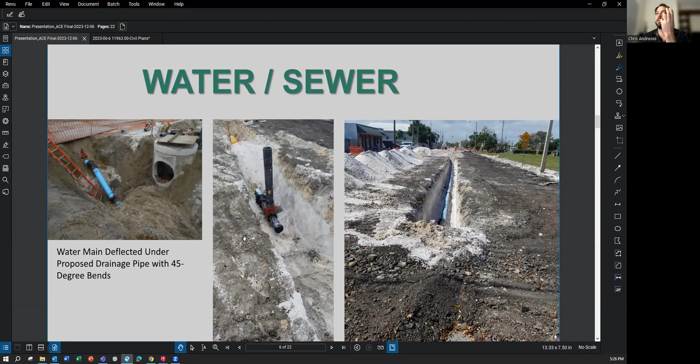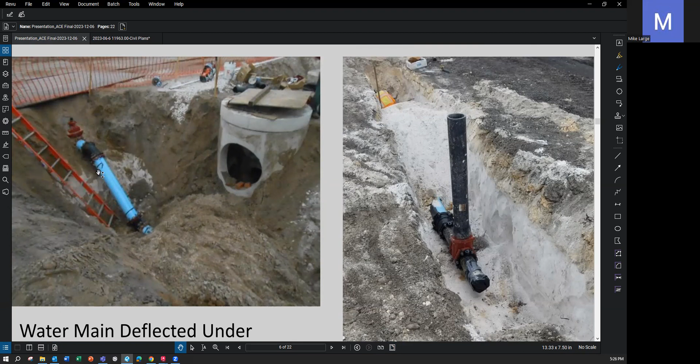Let's start with water. All right, some of the pictures on your screen are what things look like in construction. For instance, it looks like a 6-inch water main pipe going to a fire hydrant. Obviously, they're going to take care of the earthwork around it, but it's coming off a water main. And this is how water main construction looks. It's really just a bunch of pipes. It's exactly what you think.

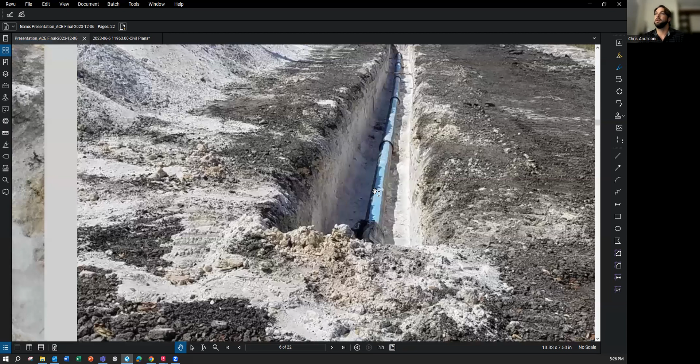Real quick, the big difference between all three, and try to remember this as I continue: water is pressurized pipe, right? The water flows in the pipe via pressure. The city has pumps and water treatment plants. That's kind of home base where all that pressure happens. So it's under pressure. Sewer runs by gravity. It just kind of falls through the pipe. You need gravity for sewer to travel through pipe.

And if you don't know what sewer is, sanitary sewer is basically everything that goes down the drain in your shower or your toilet. And then drainage, that has to do with water tables. That just goes up and down. It's not gravity, it's not pressure. It has to do with the water table in the area. Again, we'll touch on all three of those things, but those are the three major differences between the three types of utilities.

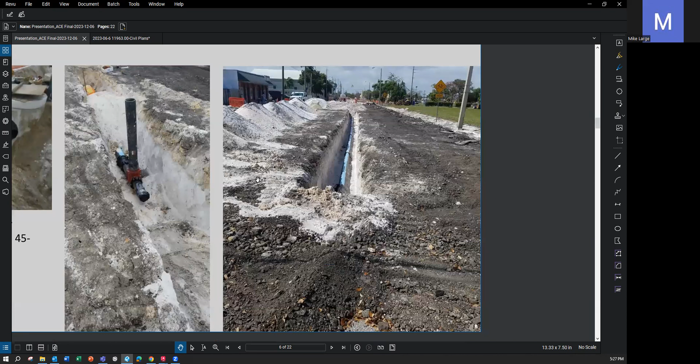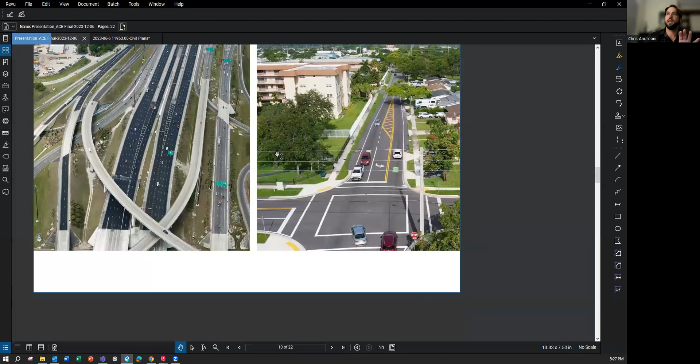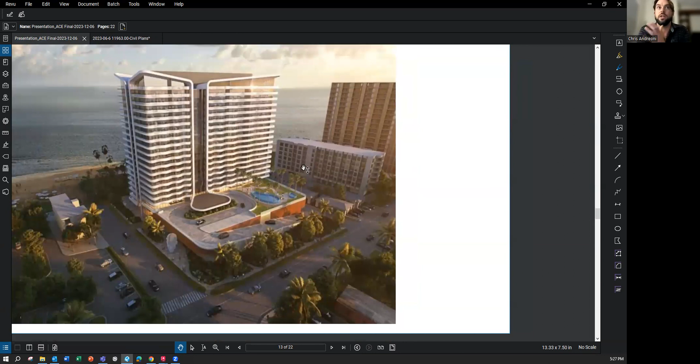So what I want to do real quick is jump around here a little bit. I think the best way to explain these things to you guys is to go through one set of plans. Okay. So the project I'm working on right now, we have a picture of it. It looks like this. This is called Casamar. It's a condominium I'm working on on the beach here in Pompano Beach. They actually just started construction maybe a month or two ago. But what you're seeing here isn't real. It's a rendering, something the architect would have done.

The architect is the creative genius of it all. What does it look like? The engineer is the one that makes it a reality. But this is where it starts. I get this picture. Oh, cool. We're going to be working on this, and then two years down the road, we're finally building it. But this is the project. I'm going to go through a set of plans. Just wanted you guys to see the final product, because sometimes it's hard to see plans for the first time. So here it is.

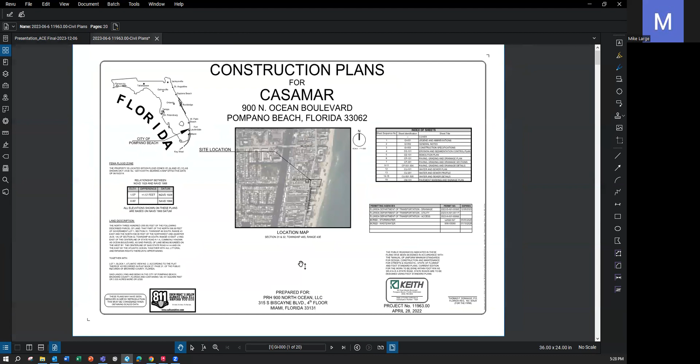It's a 20-page set of plans. This is what a civil engineer would be responsible for preparing. Cover sheet, project location, table of contents. Nothing much to explain here. The next few sheets are the legend in our plans, the general details, kind of a lot of city code in here and all that. No need to go over those.

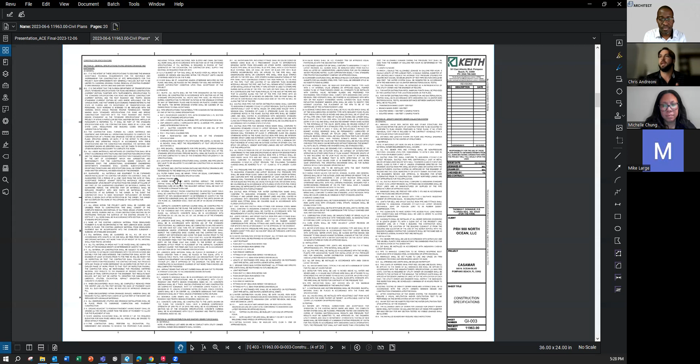And same with the specifications, material parts. All that stuff is standard language. I don't type that every time per project. Those are kind of the standard first 4 sheets. But here we go. We're going into our first actual sheet here. This one's called the erosion control and sedimentation plan.

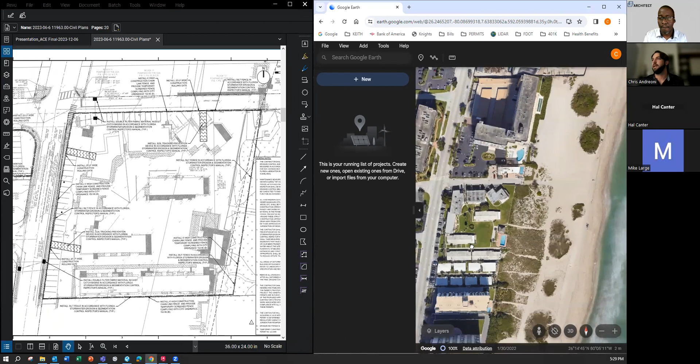All right. And what you're seeing here is the existing conditions of the site. And again, I know it's hard to read plans, so I thought ahead and I pulled up the aerial. I'll see if I can put them side by side. What you're going to see in this box over here is this site right here. See it? So that picture I just showed you with the condominium, we're going to demolish all of this stuff and build a condo on top. But building, that's all this stuff is.

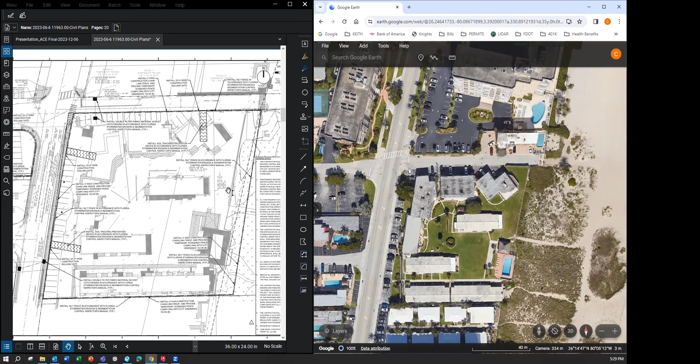This particular plan here, erosion control, it's basically you cannot pollute any of the existing drainage, stormwater system. I don't want to spend too much time on this plan, but it's basically a pollution prevention plan. This is where the contractor will access the site. He's got a rock bed that he's got to wash his trucks down. Same over here. And then over here, you can kind of see the line work.

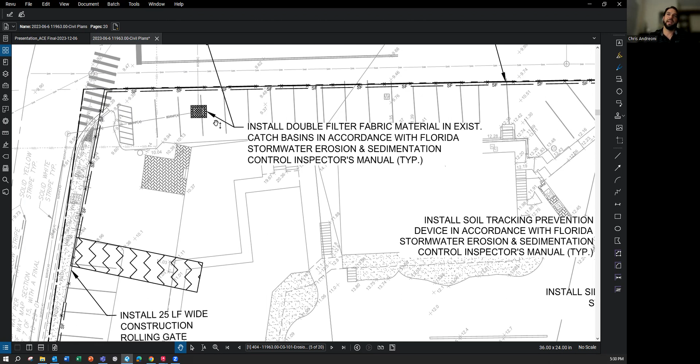That's a catch basin, a drainage inlet where the rainwater would flow to. You got to protect those. You got to put fabric over it. You don't want construction debris getting into the drainage system, because then it goes to the ocean, and we're trying not to pollute the ocean. So this whole plan is a way to prevent pollution. I don't want to focus on this because I know you guys need water sewer drainage, but might as well go through a whole set of plans.

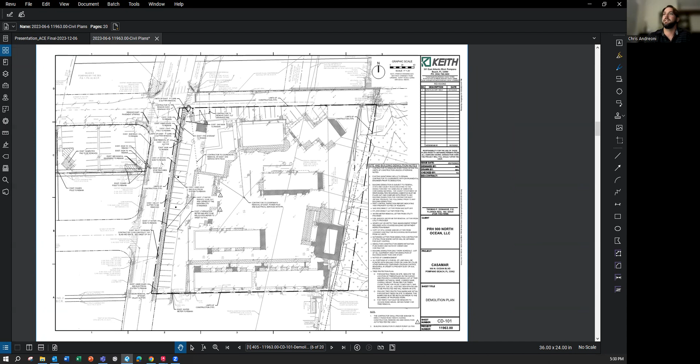Here's the demolition plan. Again, a picture of the existing conditions of the site. Essentially what this plan says, demolish everything within this big black line, and calls out some of the specifics. The existing electrical hand hole, keep that, don't demolish that. We're doing some work across the street too. The bus stop, let's make sure that stays.

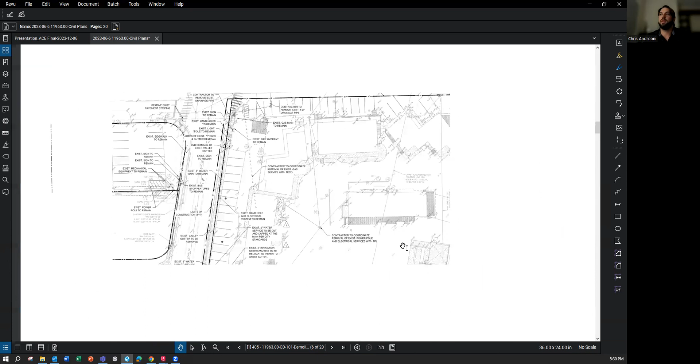So these call outs are basically things that should remain that are within this demolition box. But that's what a demolition plan basically looks like. What are you going to tear down? Everything in this box, unless I say otherwise.

Sorry. If everyone else could mute your microphone, that would help. Thanks.

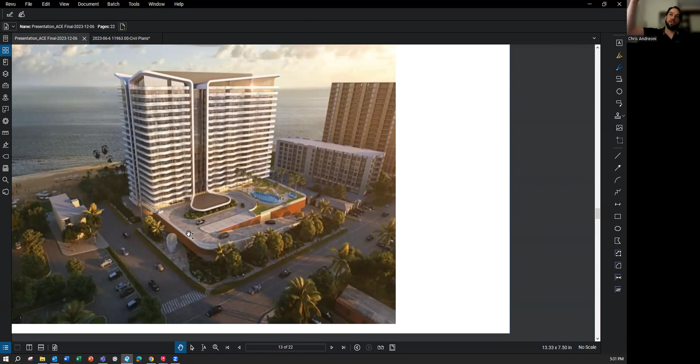All right, so just because of the order, let's talk drainage, water sewer drainage. We're going to talk drainage now. And here you're finally seeing the proposed site. And again, I know it might not look quite like this, but you got to think you're looking top down. All right. So you got the ocean over here, you got the street over here. Over here on this plan, ocean's in the back. Here's the street. And you can pretend you can kind of see through the building, right?

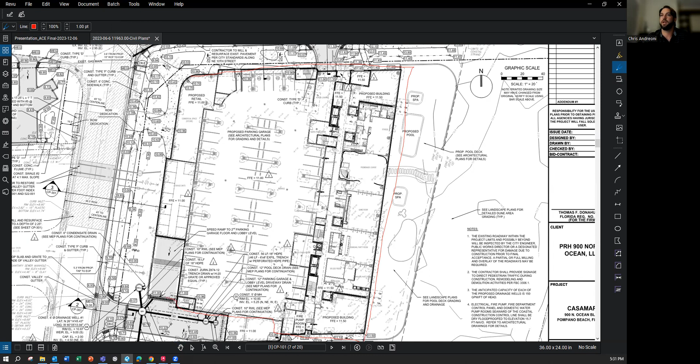That's going to be a parking garage on the first floor. What you're seeing is kind of the first floor plan. Okay. And that's provided by the architect, what I'm somewhat tracing in red right here. The civil engineer doesn't design the building. We design the site, which is everything around it. What I kind of trace in red real quick, that's the building provided to me by the architect. I take his CAD file and I slap it into the survey and start doing my part.

So in this particular job, the drainage design is shown here. If you see, it's kind of bold. And this is what it looks like below ground. You got your driveway entrance here. And if you remember from that picture, you have the ramp that goes up to that second level, right? Right here, there's that ramp. That's what you're seeing on the plan here.

And for this particular drainage design, it wasn't too complicated. What we did is we designed wells, right? So basically what happens is the water falls on the street.

That's a drainage flow area. It's going to travel to a catch basin, which is here. There's an inlet, and here's an inlet. All the water is going to travel into these two inlets some way, somehow. And then it's going to work its way through this pipe system to basically make its way to the

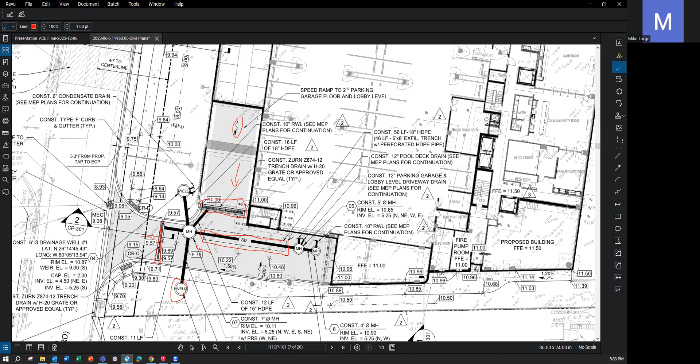well. So you have roof drains coming from inside the building, like a gutter, basically, going right into the system, traveling through what's called an exfiltration trench. That's basically a pipe in a rock bed. And that's how filtration occurs prior to discharging into the well, and the well pumps the water into the groundwater

table below the earth. So that well might go 50, 60, 70 feet deep, depending on what it is. And the water all makes its way to its well, and that's where the water goes. So when it rains, that's how it doesn't flood. It goes to this well, and part of the civil engineering design for it is a lot of math involved to figure out how fast is that well going to drink the water.

Is it going to drink the water fast enough where your site doesn't flood? Are you meeting pollution requirements, aka the exfiltration trench? Are you treating the water before you're discharging to the well? This particular site had 2 wells, probably because the first well didn't have enough capacity.

And the way you check its capacity, you go out there, you do exploratory drilling, and it's as simple as drilling maybe a 4-inch hole until you hit the water table, the aquifer. And the guy will go out there, fill that pipe that he just drilled with water, and kind of time how long it takes the water to go down. And that gives you flow, right? Volume of water over time, that's flow.

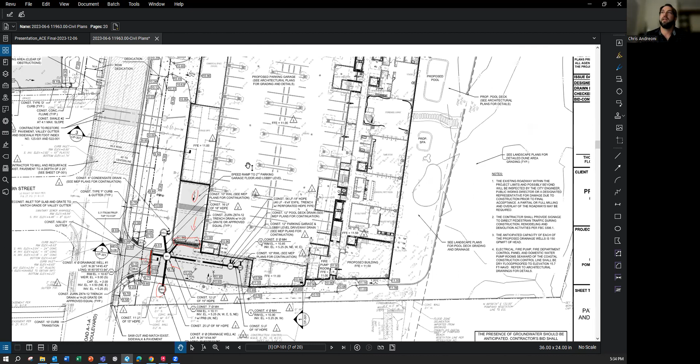So all that math and what you'll learn in school and college, basically: do these 2 wells drink enough water fast enough to make sure this entire site does not flood? And that's drainage. A quick question on the wells. What's the makeup of the wells? Like if you were to cut a section through a well, what does it look like?

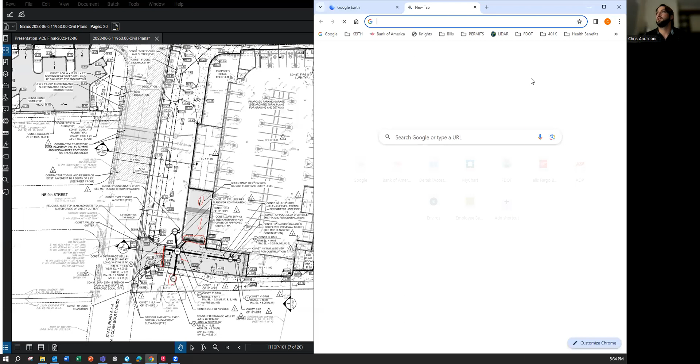Is it rocks or... Good thing about Google, we have image search. Okay. Probably easier to show you on an image than it is to explain it. There you go. Something like this. Right, so this is how the water gets from the site, then it gets into the well. This well is drilled. It's just a big hole in the ground, and it's got rocks around the perimeter.

They have a pipe coming up, and basically the water percolates through the rocks and into the ground or the earth. So how fast does the water percolate? This water needs to percolate into the earth faster than my site floods, essentially. So that's a very generic way of what a well looks like.

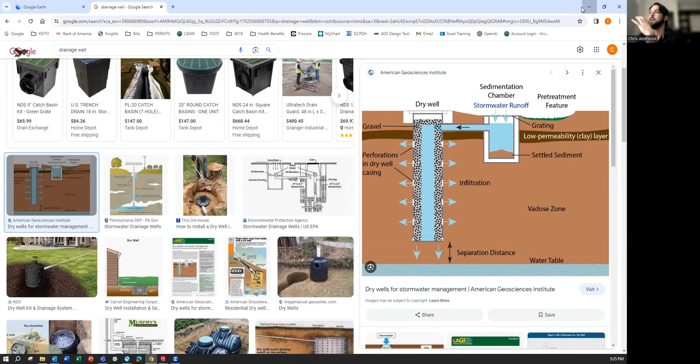And to get more technical, on a civil engineering plan, this brings me to my next sheet, we have details. So when you go from your paving, grading, and drainage, now you can go reference your details. So that's what these next few sheets are. Without talking about every nitty-gritty detail, I'll go over and show you what the well detail looks like and the

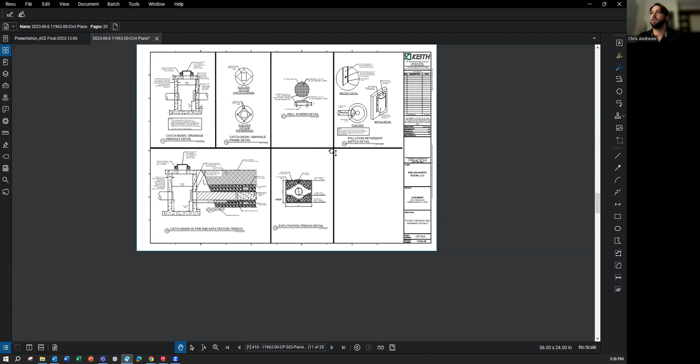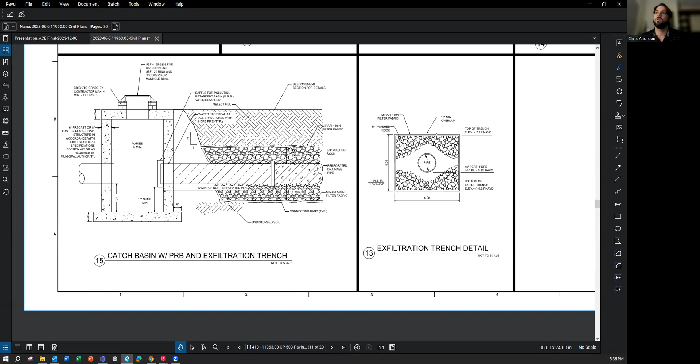exfiltration trench. So real quick, that exfiltration trench, this is what I was talking about. It's a perforated pipe. It's a pipe with holes. Kind of works like a well. It's working left to right instead of up to down. Water gets into the catch basin, travels through here, percolates through this rock bed. That's considered a way of treating the stormwater prior to it making its way to the well. So the well is downstream of here.

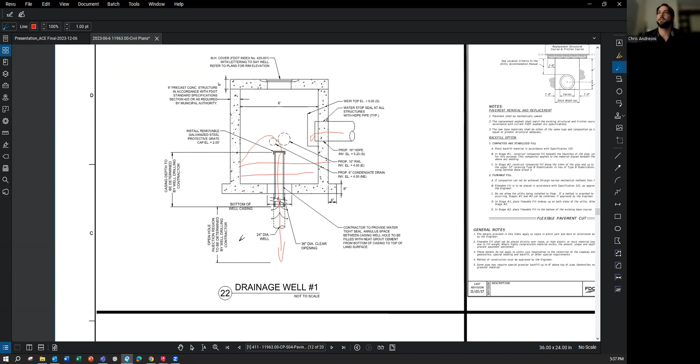But that's how a well works in a nutshell, without getting into a dissertation of it all. But last thing I'll mention on the paving, grading, and drainage sheet is, yeah, that's what the drainage infrastructure looks like: the catch basins, the manholes, and the pipes that interconnect them all. Another big thing on this page is you see the grading, right? That's what all these little numbers are. That's our way of designing which way the water goes.

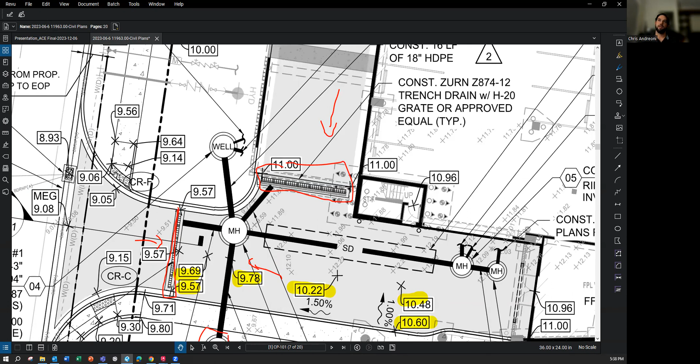Over here, you have a sidewalk. You got the handicap ramp. Comes up from elevation 914 to 964. This is in feet. So the difference between 64 and 14 is 50, or half a foot, 6 inches. So those handicap ramps always come up at a 6-inch elevation. So the sidewalk's high, slopes down to meet the grade of the street, cross the street, come back up and hit the sidewalk here. And then they slope up. But that's what all these little numbers are.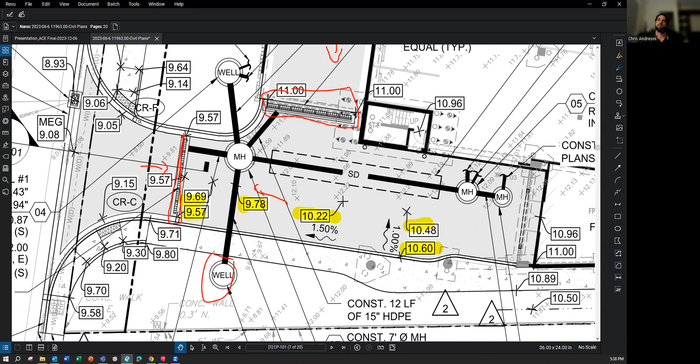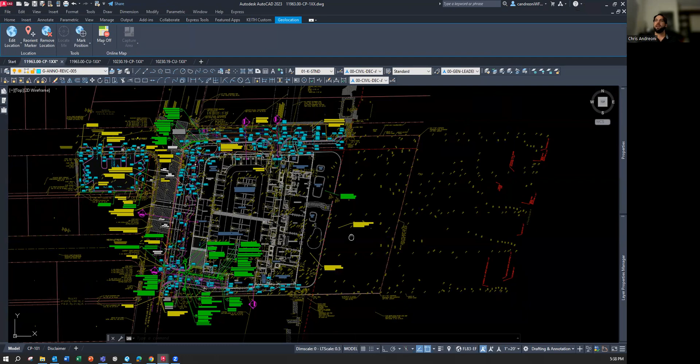So your grading design has a lot to do with your drainage as well. You got to get the water to travel to the inlets, right? So that's drainage in a nutshell. And just for fun, because we said we'd talk about CAD a little bit, this exact same sheet, this is what it looks like in AutoCAD. Okay. Over here, you got some colors, a little easier to differentiate between what's what. And you also have ways of isolating things. So I have all my labels calling it out, but what I can do is I can freeze some things. So maybe you can just see the site and what we care about, right?

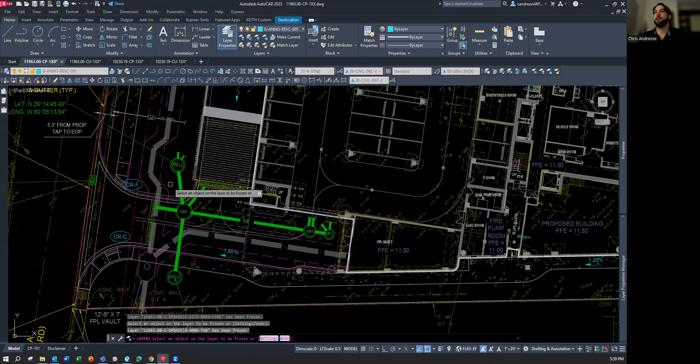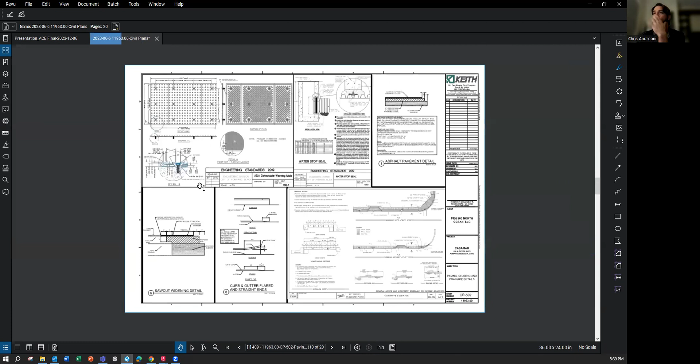So all this stuff is just physically drawn in AutoCAD, and it's just a bunch of lines and circles and a lot of geometry. But there's the drainage in green, and yeah, this is kind of what it looks like in AutoCAD. Draw the lines, label it. So that's drainage. Any questions on drainage before I move on? Okay. We'll go over to the next plan. So these next few sheets are the details specific to the paving, grading, and drainage sheet, right?

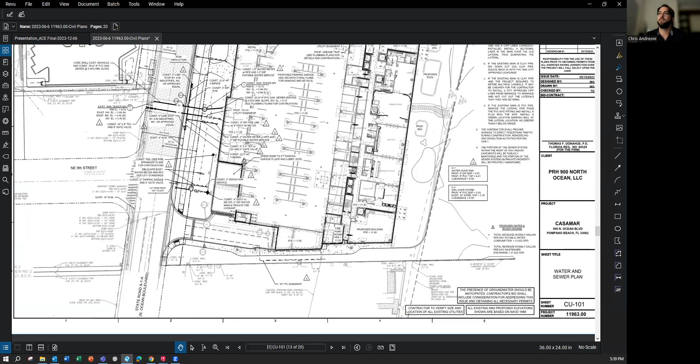The next plan is your water and sewer plan, right? So in this particular plan, you still got the building. Again, that's the parking garage. Remember, you're looking at the roof down. So don't pay too much attention to this. We're just worried about the site as civil engineers. So we talked about drainage. It's kind of faded in the background of this plan because this plan's not about the drainage. It's about the water and the sewer, right? So that's why these callouts are now bold. So we'll start with water.

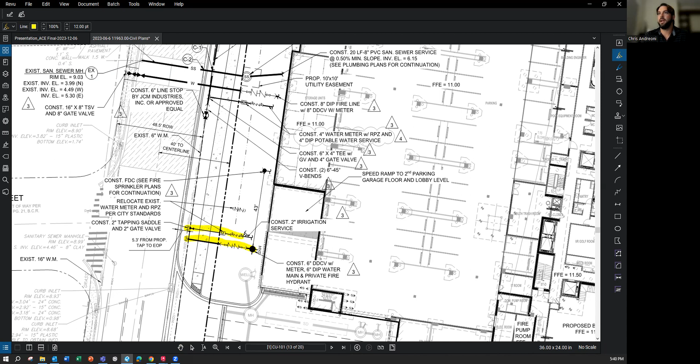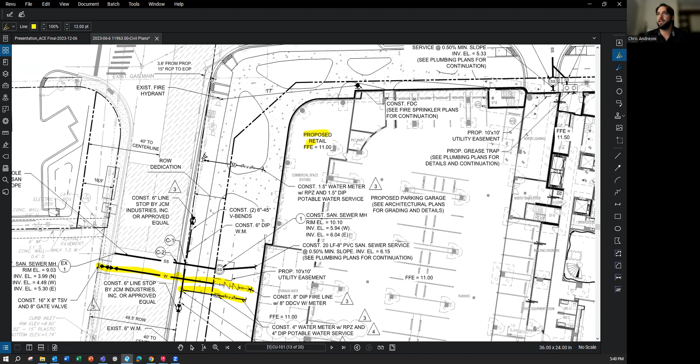So for the water, we have a fire hydrant. We have your irrigation line right here, your 2-inch irrigation service. You have your fire department connection over here. Over here, you have your potable water design, your fire sprinkler design. Okay, and we'll stay focused on water. That's the sanitary. We'll come back to that. And this particular building has a restaurant or a retail right here, kind of on the first floor. So it needed its own water service with meter and backflow.

And that's what this symbol is. M is for water meter. That's how you get your water bill. And the backflow preventer is what this symbol is. A backflow preventer, essentially, lets water go one way. It lets water go this way, but it won't let it go back that way. It stops right there. Because once the water crosses your meter, it's your water, you own it.

But what this is, W, that stands for existing water. This is the existing water main system that's in the city street. So what we're doing is we're tapping into the city water system here. So that's what this is. We excavate down, find the water main, we cut it, or we do a tapping sleeve and valve, we tie our pipe in, install our meter and backflow preventer.

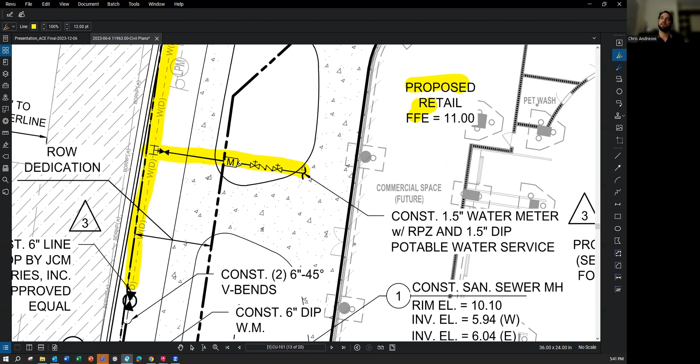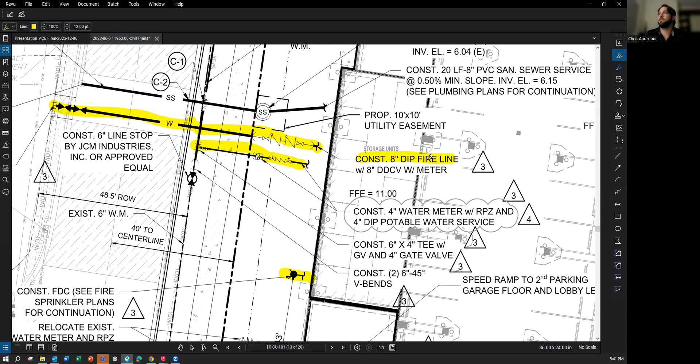So this one in particular is for this retail space. And then for this condo, this big condominium building, it needs fire sprinkler. Fire sprinkler water, it's an 8-inch water right here, 8-inch ductile iron pipe. That's the material. Fire line with 8-inch double detector check valve. Double detector check valve is just a specialty backflow preventer for fire sprinkler, but it's the same thing.

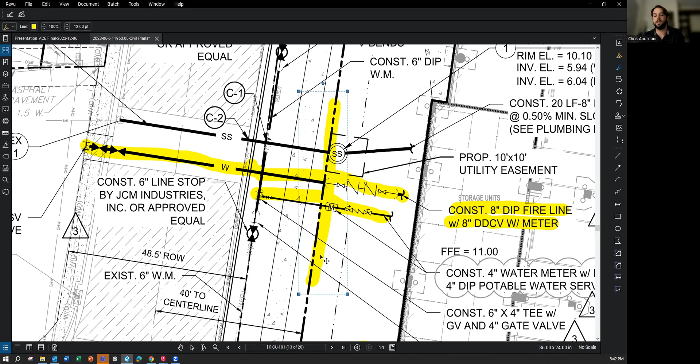You tie into the city system here, provide the 8-inch pipe with the proper backflow so you don't pollute the public system, because this is the property line. Once it crosses the property line, it's your water. So backflow preventers are required so the water doesn't get back into the system. And just so you know what those things look like, you see them all the time driving around, but you've never noticed them.

They look like this. You see them all the time in the streets, probably see them outside the front of your school, but that's all it is. It's above ground. The water comes in, this apparatus prevents the water from going back. It's 8-inch pipe. That's what supplies your fire sprinklers. Okay. And then for the other backflow preventers, it's a similar device. It's just smaller because the pipes are smaller.

But going back, so that's what these things are. Tap into your city water supply, provide your meter so you can get your water bill, and provide a backflow preventer so you don't pollute the public water supply. For this particular site, it's a very simple site. Notice, why wouldn't I just tap into the city main one time and then stub off and supply all my water off one thing? You'll learn this in college. That doesn't work for hydraulics.

Without getting into a hydraulics lesson, each one of these features needs its own tap off the city main. And that's required by building code, and again, it has a lot to do with the hydraulics, the amount of pressure of water flowing through those pipes. The more length you add to this line, the less pressure you're going to get downstream. So that's why you do individual taps for these things. So a fire hydrant is here, and then this is for your irrigation.

But what I do want to talk about real quick when it comes to water, let's talk fire. Right here, you have what's called a fire department connection and a fire hydrant. And if you've ever heard fire trucks called pump trucks or pump engines, this is why. In case of a fire, a truck would park here in the street. He'd take his fire hose, he'd hook it up to the fire hydrant. His truck is a pump, and he'd hook a hose up to this fire department connection.

So let's say the city water supply is losing pressure in the event of a fire. The fire sprinklers have been running, it's starting to lose water pressure. Now you can pull up a fire truck, hook up to a hydrant, and pump water right into the fire sprinkler system. So that's what a fire department connection is. It's a way to repressurize the fire sprinkler system in the event that you lose pressure. Initially, the fire sprinkler system will be supplied through here.

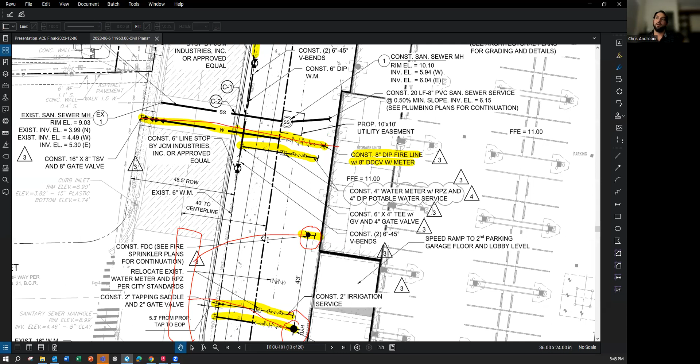And once you get into the building, now we're talking plumbing. Civil engineering and plumbing, two different scopes. So that's why the civil engineer's job ends pretty much 5 feet outside the building. But that's water in a nutshell. We talked fire water, hydrant, potable water or drinkable water. For the main condo, they need a 4-inch potable line, meter, backflow, and for some of these retails, just a small 1.5-inch line. And the plumber helps you size those requirements. So that's water in a nutshell.

But on this plan, we also have sewer. Real quick, any questions about water? Okay. This sewer is nice and easy, so we'll go through it real quick.

Sewer is what this is. So everything that gets flushed down the toilet eventually makes its way to this one pipe and into the city sewer system. And the city sewer system eventually leads to a wastewater treatment plant where they treat the wastewater, and they either use it for irrigation water, reclaimed water, or dispose of it in a different way. But that's where it heads.

It goes to the wastewater treatment plant. And the plumber takes care of all the toilets, all the sink drains, kind of gets them all coming down one single pipe, and it gets here. And the one thing you have to see here is it's just one simple call out. We have elevations because remember, sewer flows by gravity, right?

So a pipe invert is basically the elevation of the pipe in the structure, which is just like the drainage structures we were talking about. It's a lid with a big box underground, right? So we want the sewer to travel this way towards the city system. Obviously, the pipe has to be at a slope, right? So this elevation west, the west invert, 5.94, is going to be higher than where we're tying in east, 5.30.

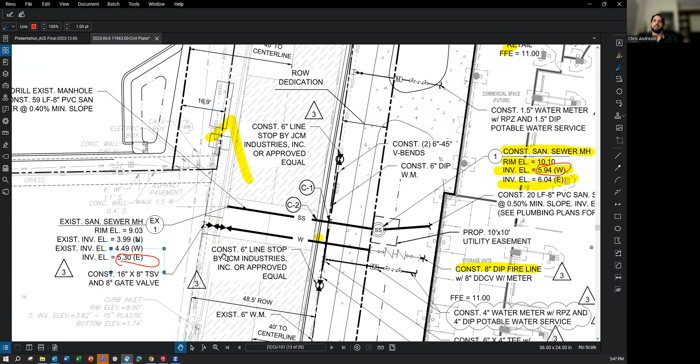So it's not a lot of difference in elevation, but it went from elevation 5.94 to elevation 5.30 in this particular pipe. And sanitary sewer design is pretty simple in that regard. You have a manhole every once in a while, just in case maintenance needs to be performed and you have a way to access it. But essentially, it's just gravity. It slopes at typically 1% coming out of the building. So 1% slope, rise over run, and that's how you set the elevations on your sanitary sewer. And for this particular project, the sanitary sewer is really that simple.

Switching back over to AutoCAD, where it might be more fun to talk about a different one with sanitary sewer. This is a site that has, I don't have a picture of this, this is what it looks like in CAD. It's got multiple buildings. Try to focus on the white. That's a building, that's a building, many buildings. So on a site with many buildings, you zoom in, the orange line work is the sanitary system.

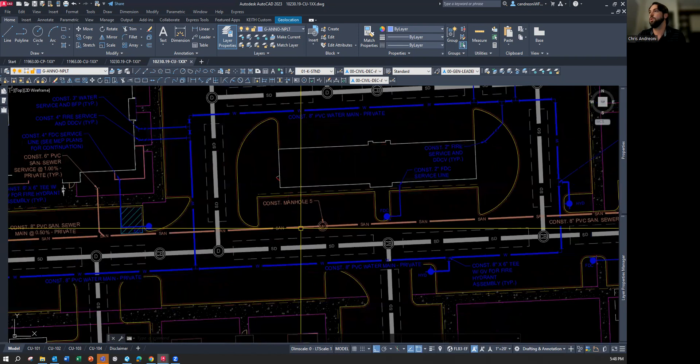So I'll just kind of travel here. Every building comes out of the building, goes into the sanitary main. Some buildings required more, and you really just follow the path. You design this pathway, and the goal is to get it offsite into the city system. So you keep following this, some way, shape, or form, the building has a way to get into the main system. And eventually it leads offsite right here into the city's main sanitary system.

I think I can isolate it, which would be cool. No. But I just wanted to show you with multiple buildings, you might have to design a main for an entire site. So the example I gave you was very, very simple, but on another site, there's over 1,000 feet of pipe here for the sanitary, for everything that goes down your toilet.

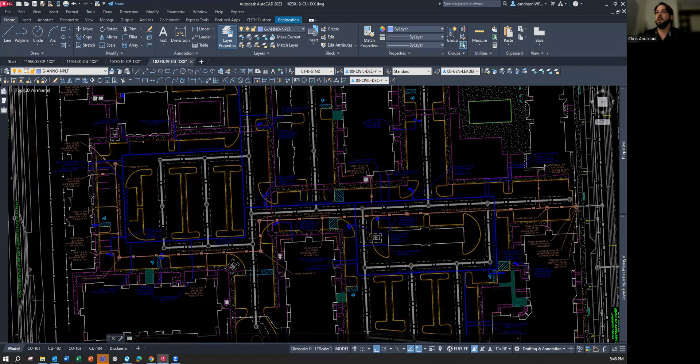And then it's the same thing with water. Every building has a meter and a backflow preventer, or a fire department connection, or a hydrant. But what we have is the main water main, right? So each one of those things that go to the building needs its own tap. So for this particular building here, you have your 4-inch fire water service. You have your 4-inch fire department connection to repressurize the sprinkler system. Over here, you have your 3-inch water service for drinkable water.

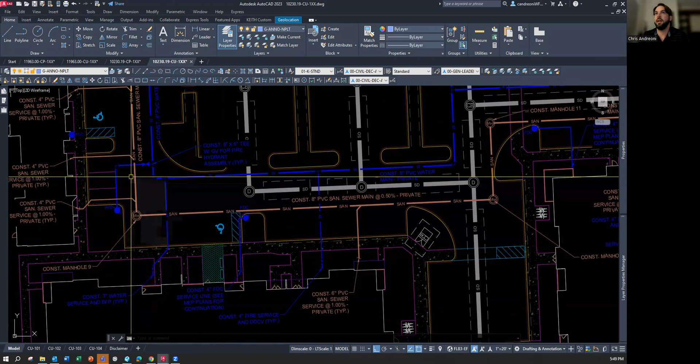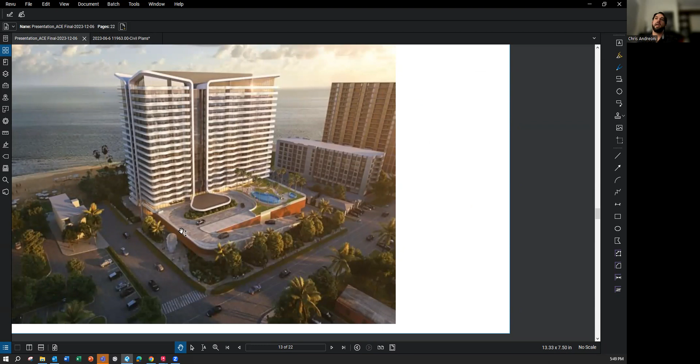And it kind of is the same pattern all the way through. This building has this guy over here, and it's the same pattern. Each one of these things have a backflow preventer. But that's what it looks like in CAD for a different project, a little bit more complex water and sewer design. But anyway, that was water, that was sewer, that was drainage. And those are the main topics we do here at engineering, civil engineering.

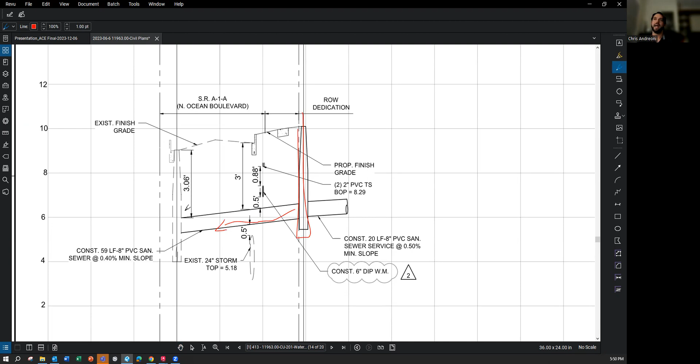What I'll do here is I'll kind of just finish flipping through these sheets without talking too much about them. But these sheets get more complex. Like I said, sanitary flows by gravity, right? Here is an out of scale pipe run. This is the drainage structure. This is the pipe. This is a way to show slope. It's out of scale. Might not look like a drainage structure, but these things are actually 10 feet wide in some circumstances. So the vertical and horizontal scale are weird, but that's what this sheet is.

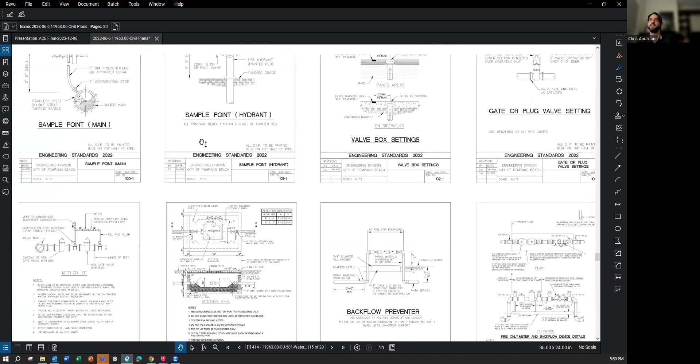It's the profile, right? You can see the vertical design of water and sewer. Here are standard details. Here's your backflow preventer detail. There's many, and these are actually city provided. Every city has their own details. So what we do is we obtain them from the city and make sure we're following city standards.

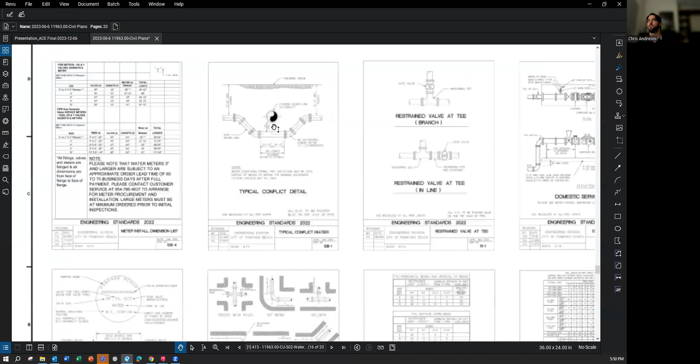Here is a hydrant detail if you wanted to take a sample of the water quality. But that's what this sheet is, and they're just city standard details. And we have a couple of sheets with these specific details. So where you see your backflow preventer, your meter, your crossing information. I have a water pipe crossing a sanitary pipe. I have to make sure I need 12-inch clearance between the two, basically.

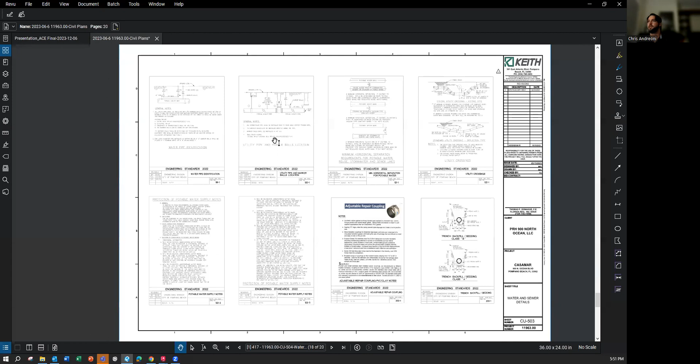So that's where you get a lot of your information is, believe it or not, design information from the city standard details. So there's a few of these sheets. We'll go through them. And then I think the last sheet I want to show you, something else we do is we do the striping and the marking. This is the last sheet of the whole plan, sheet 20 of 20.

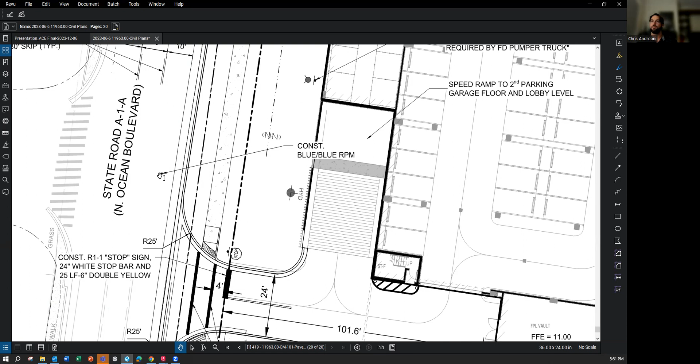And this is almost a common sense thing. You guys drive in the streets all the time, right? You got your double yellow, your stop bar, your crosswalk striping, those reflective pavement markers in the street. They signal that a hydrant is right there. That's how the fire truck guy knows. A blue pavement reflective marker. There should be a hydrant perpendicular with it.

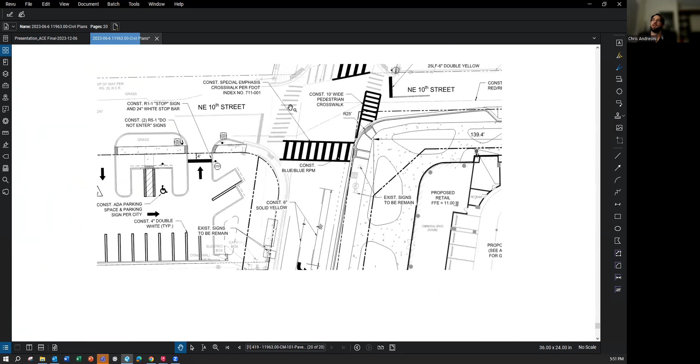But yeah, this plan here, we are striping the street with the turn lanes, the center turn lane and a crosswalk here, crosswalk there. If it's bold, it's proposed, it's new work, we're designing it. If it's kind of screened in the background, it's existing striping, right? So this is the existing crosswalk. So that's really the last set of this plan.

And that's, you know, it took 2 years to get to this point. So I know we could talk about it in 10, 15 minutes, but a lot of coordination with architects, plumbers, electrical engineers, mechanical engineers, the city to use their water sewer drainage, getting the permits to tie into the city-owned water sewer drainage systems. A lot of effort goes through this.

But this is kind of the engineering specific, the deliverable, right? Here's our final report, our final product. This is what you paid us for, is these sets of plans. But again, something as special as this condo, that was about 1.5 to 2 years before we broke ground, from the day we met the architect. Yeah, that's, I'd say, civil engineering in a very quick nutshell.